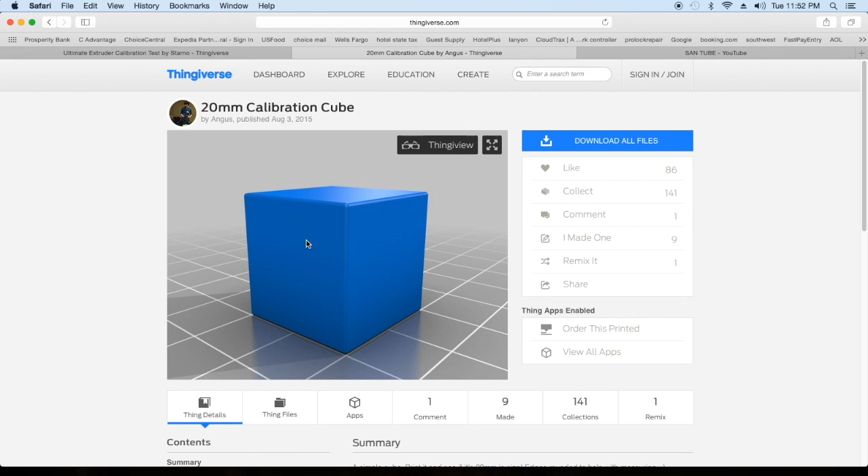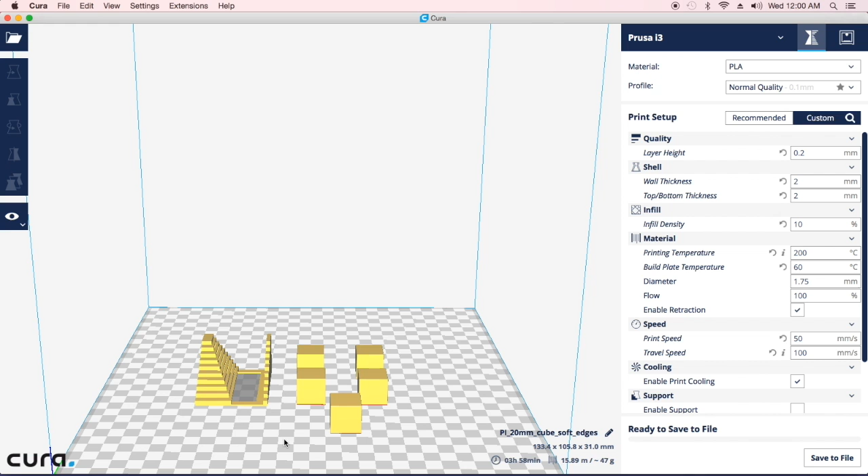So the first thing we're gonna have to do is go ahead and open up Cura. Okay, so here we are in Cura. We have imported our cubes and our steps, or whatever you call this, the ultimate calibration rate steps. Anyways, moving along. I'm gonna print all of these in the same print. Now you're probably wondering, well, if I'm doing temperature change and flow change and other things like that, why am I printing them all together? This is just a side note, guys. There's a lot of cool things in Cura that I feel like people don't know about. I am going to make a video about this later, but for right now, just really quickly show you.

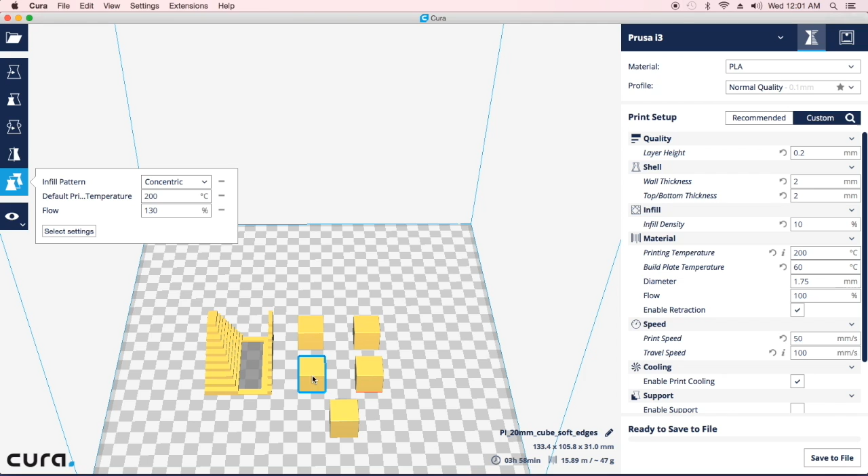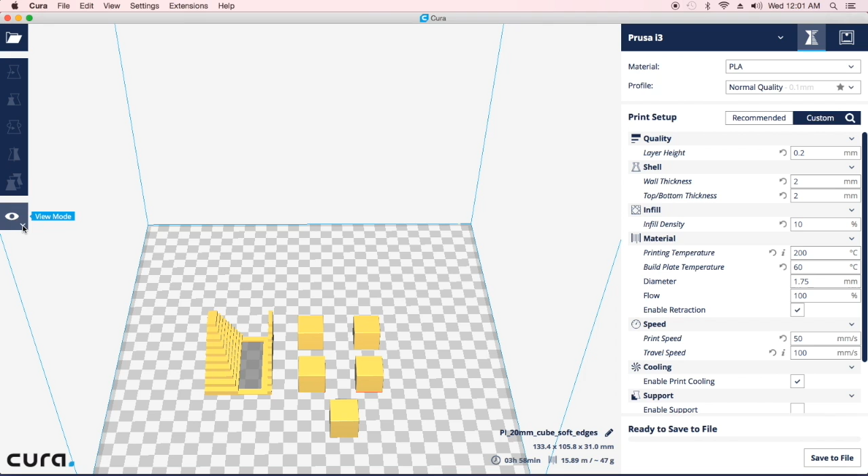If I click on this cube back here, my infill pattern is different, my temperature is different, and my flow is different. I click on this one, it's just whatever settings I have here. Here, again, infill pattern, temperature, and flow is different. So the temperature on this is normal, but the flow is different. It's higher. On this one, my temperature is higher, but my flow is different. And this one is just the perfect print. This one, we're going to go ahead and adjust this in the tuning feature of our 3D printer because I can't cut off sections here. But this is actually a pretty cool feature, guys, that I am going to make a video about later.

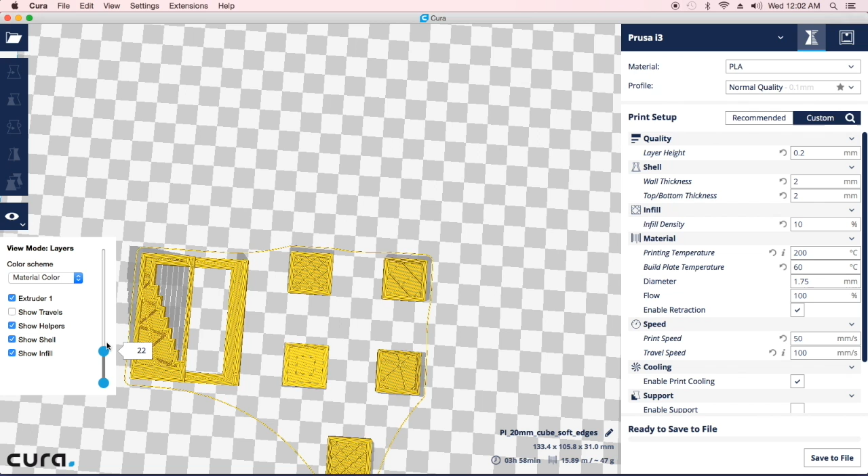Just to let you guys know, I mean, if you just get rid of this crap. If you just look right here, every single one of these is different. I mean, I got different infills in all of these. I got different temperatures in all of these. You can do different layers. I mean, you can do whatever the hell you want to each individual thing and print them all on the same bed.

But again, that's something I will go over in another video. I will make that if you guys want it. If not, there's a brief description of it.

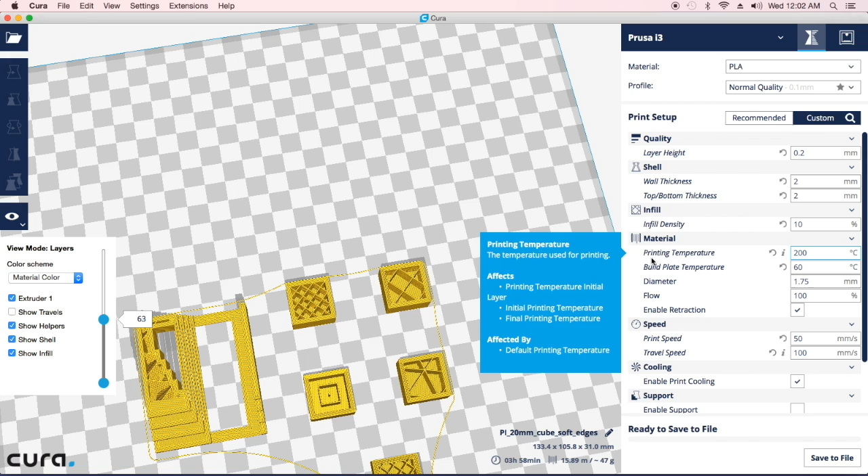But by default, we're going to do layer height 0.2, thickness 2, bottom and top thickness 2, infill density will be 10, temperature will be set at 200, build plate temperature at 60, diameter of course 1.75, flow will be at 100. We are going to enable retraction.

Retraction, basically what it is as you see here, guys, this is just a travel of how it's going to go, but this could actually be stringing. Okay, if you don't turn on retraction, the extruder or your nozzle will be spitting out filament as it travels from here to here. So that's what that is. So we're going to leave that turned on.

The speed's going to be 50, and the travel speed is basically when it gets here and is going here, it's going to move faster. So while it's printing, 50, from here to here, 100. Okay, I've turned on the fan, so basically by default the first couple of layers will not get any kind of cooling, just so it comes out nice and hot and sticks to the bed.

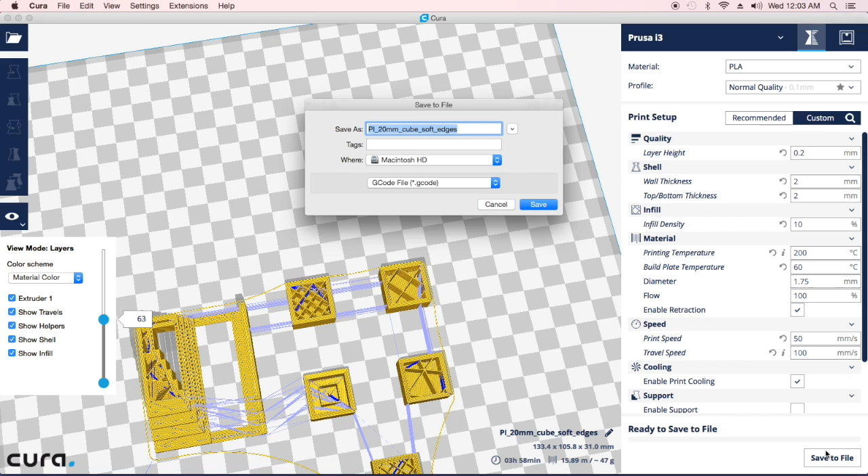Okay, so with that said, I'm going to go ahead and save this to my desktop like so, and just hit save, and we're all done on this one. So let's get it printed. And I think I might go back and change these guys and print the cube separate and print this separate. Actually, I am going to have to print it separate because I got to change this manually.

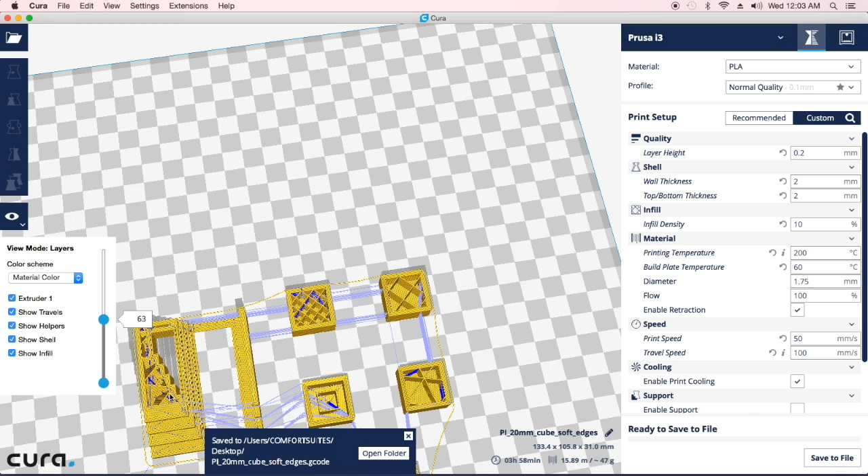So let's go ahead and delete that. Then I'll make a different Cura STL file for that. But I'm just going to go ahead and save this, and then after I do that, we're going to go ahead and start with the printing.

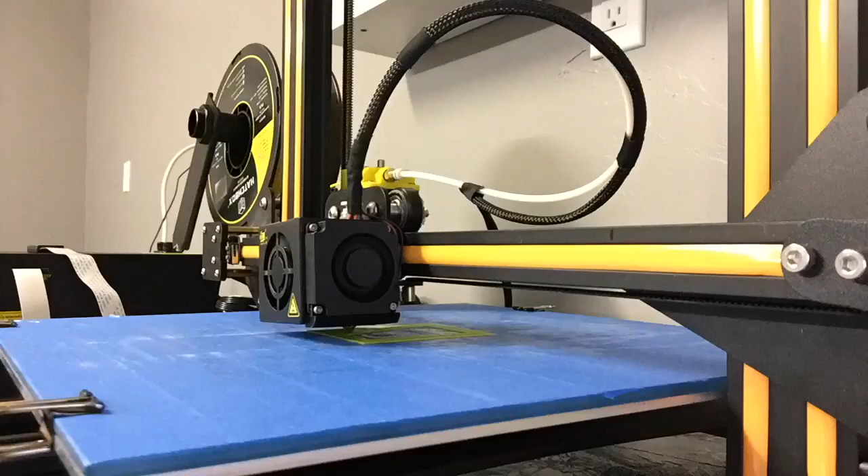Okay, so the printer is printing here. We're just going to go ahead and make some tiny adjustments to it. Given your printer, if you are able to change the settings in the control box, that's great. If not, then unfortunately you're going to have to go into the slicing program again, and from there redo all the settings. Okay, so what I'm going to do is go to tune, and the first thing I'm going to change is the nozzle temperature.

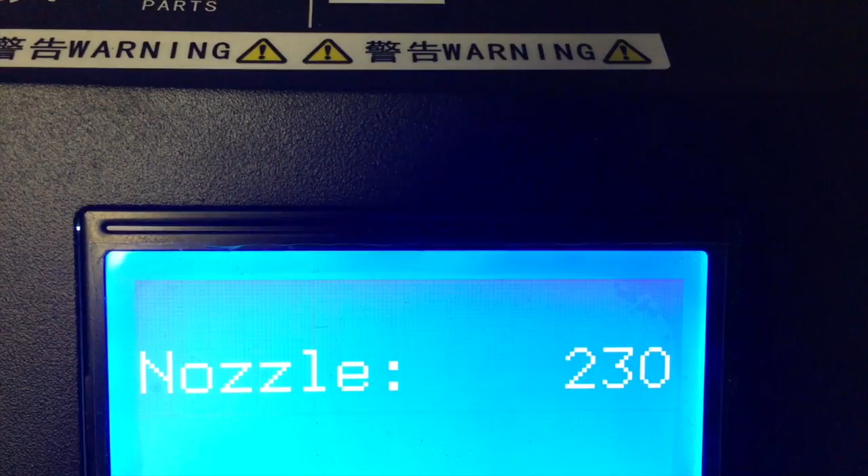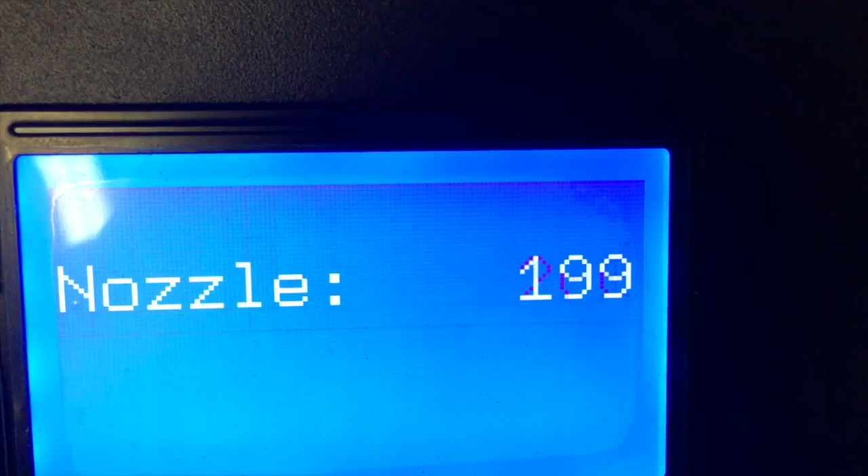Now, the filament that I'm using is temperature gauged for roughly around 180 to 210, but I'm doing it at 230 to prove the point. So I'm going to take that down to about 200. And that's the first change we're going to make. And we're going to give it some time and let it print and see what happens.

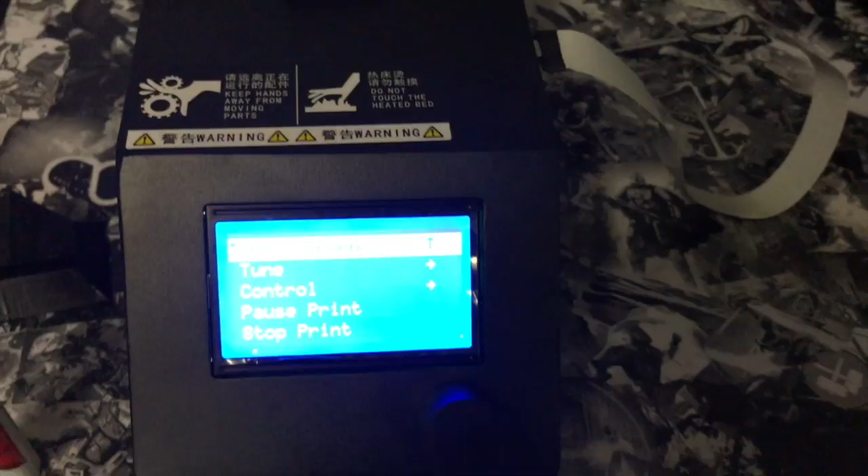Alright, so right there we went ahead and changed our nozzle temperature from 230 down to 200. Now we still have the flow rate, which is a little bit higher, but this will just do the temperature itself, so we can point out a difference at the end and you can take a look. We're about to stop it again and go ahead and do the flow change.

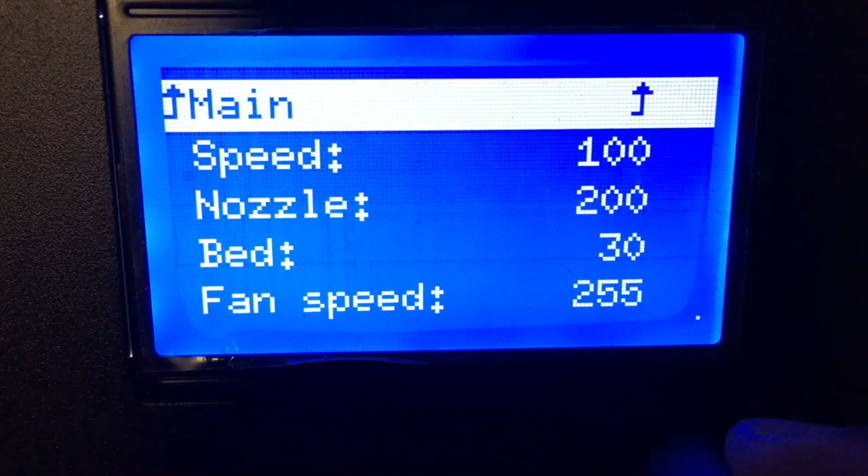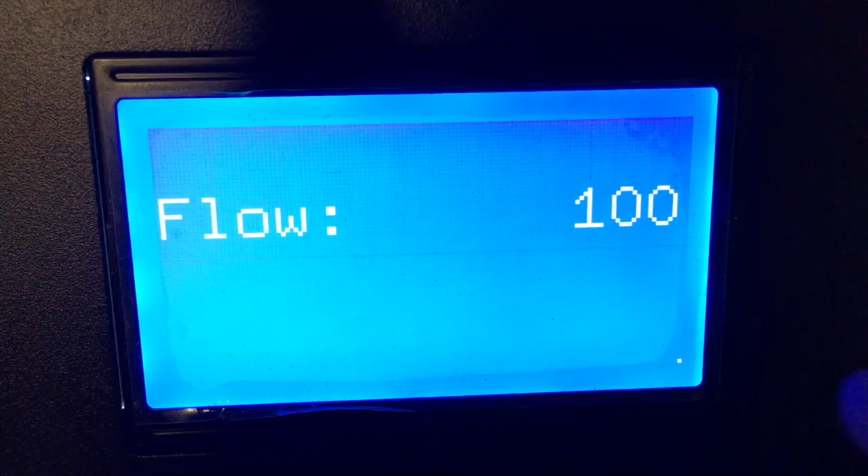Alright, as you can see, the print is still going. We're going to make a few more adjustments on our control box here. We're going to go to tune one more time. And we're going to change the flow from 130 down to 100. Okay?

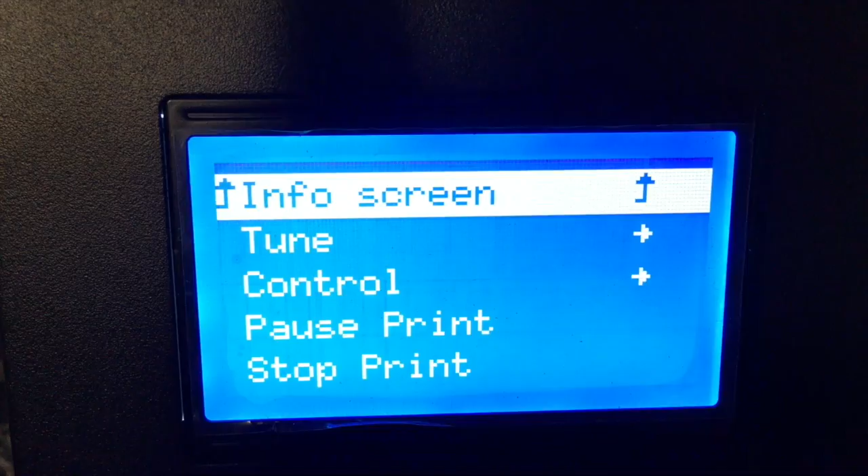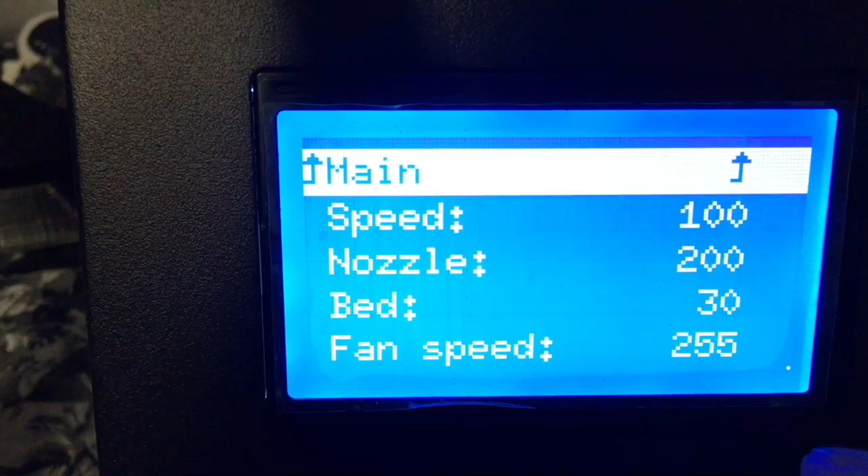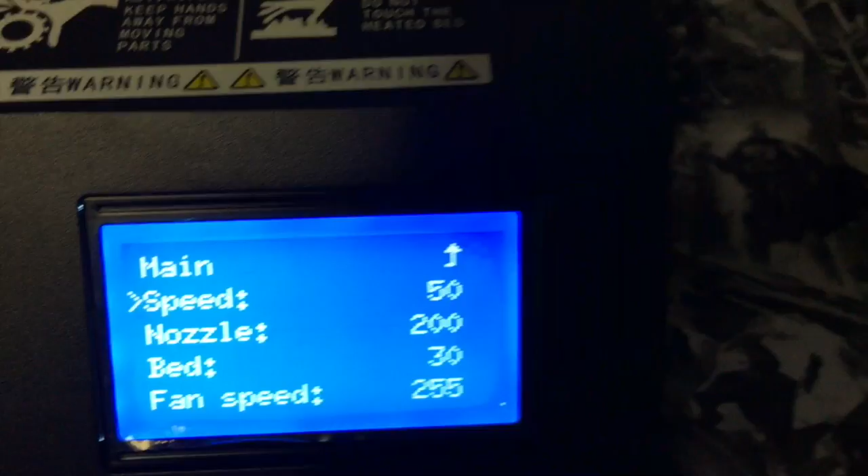Right back up here. Oh, one more thing we're going to change, guys, on here is the speed. We're going to take the speed down from 100 down to 50. And we're going to see how much of a difference that makes. So now you notice the printer is working a lot slower speed-wise, which is going to increase my time, but that's okay.

Alright, so we went ahead and changed the flow rate and the speed on that. So we reduced both. So now our filament is coming out a little bit slower, and the speed that we're actually pushing that out has gotten slower as well.

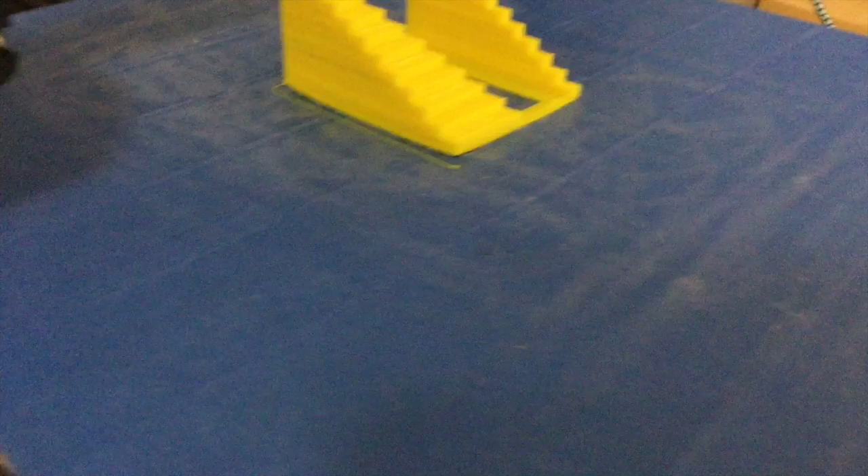Now one thing I want you guys to notice right here, right off the bat, with the print still on the bed, do you notice the curve right there, which I'm going to talk about later? Because of the heat, it did not stick to the bed, and I usually never have that problem. So these are just some of the things that you're going to run into if you don't calibrate it right. So now this is just a different angle of that, and on this side you'll notice there's a little bit of warping as well. Nothing too dramatic.

After this, we're gonna go ahead and take this bad boy right off the bed and get started on our little cubes. Alright guys, so now we're printing out the cubes, and the back left is going to be the one at the higher temperature, and the front left is going to be at the high flow rate or the extruder rate, and the ones on the front and the sides are just there like normal, just to show you guys what it's supposed to look like. Okay, so let's get these done printing and we'll go from there.

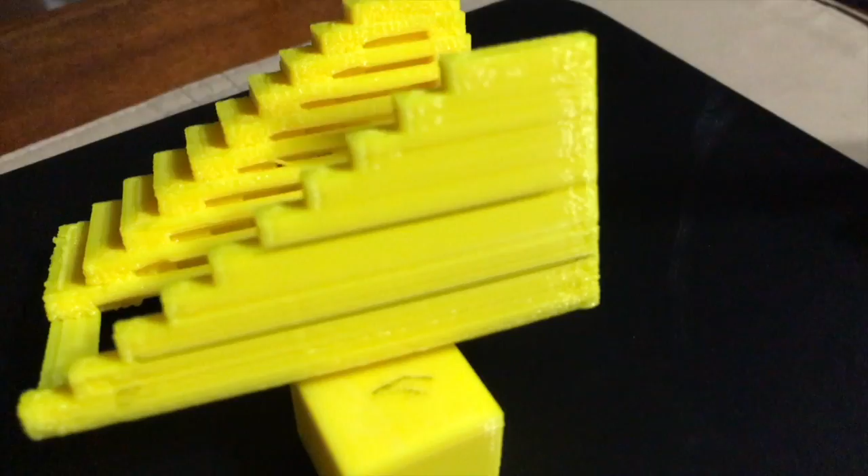Alright guys, so we got the calibration steps printed. What I'm going to point out here is you got two lines, one here and one here. Basically, if you notice this area here, it was printed at 230 temperature, when the recommended was 180 to 210, but we went a little bit over, and from here to here we just turned down the flow from 130 to 100.

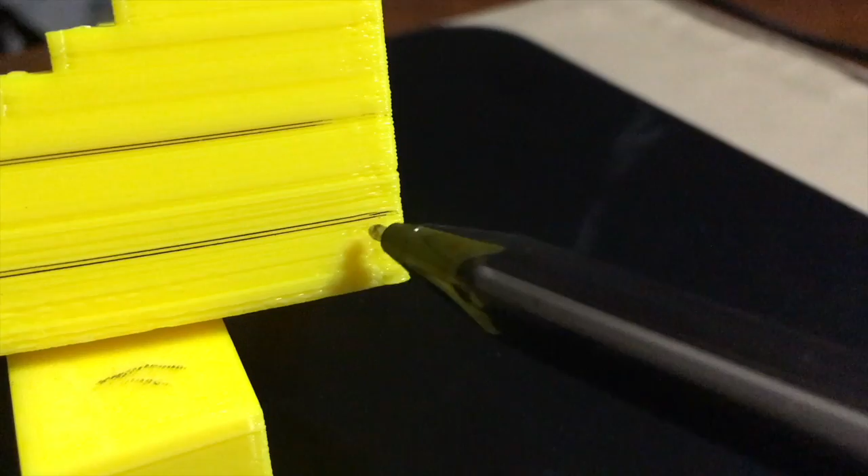If you look right down here, see, the layers are not very smooth. There's a little bit of gap because there was so much heat, it didn't give it time to properly cool, so it didn't stick together that well, and that's why you have this line here. And look at the edge, got the little bubbling right there, looks like it was melted, and that's because again the temperature was too high.

But now pay attention from here to here, we got a little bit of improvement, and all we did here, we just took the 230 and reduced it down to 200. Now the flow was still at 130 and 230 for temperature here. Here we turned the temperature down and took the flow from 130 to 100, and you can see the difference, from there to there.

And then from here, basically I just turned the speed down from 100 to 50. So you can see temperature makes a difference, the amount of flow makes a difference. When you have everything set right, look at how smooth that is. Also down here you'll notice the melting, but notice as you get higher and higher, it gets sharper and sharper. So eventually you get to this point where it's just a straight line. These don't look straight at all, they look edged.

Now another point you can look at is here. Notice, I don't know if you can see it, down here it's a little saggy. Basically when it printed, it didn't give it enough time to cool down, so this started sagging down. Again, this was the temperature, and here we just turned down the 230 temperature to 200, and we also reduced the amount of, not infill, but the amount of flow that was coming through.

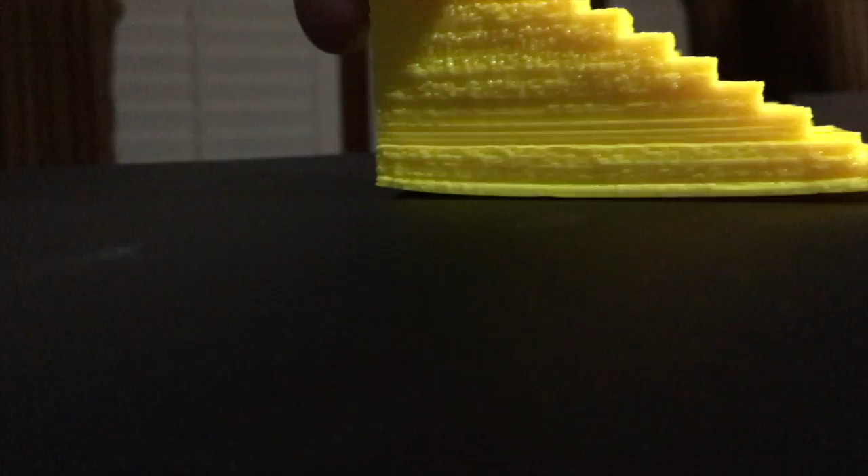Now, I don't know if you guys can tell, but because the temperature was so hot at the bottom, this part's actually warped. It's not a straight line, it actually curves. Let's take a look. There it is. See how this part's not touching the platform, and this part's not touching the platform, but the middle is. The reason it's doing that is because it was so hot, it didn't stick to the bed, and it popped up. So these are some of the main concerns that people have.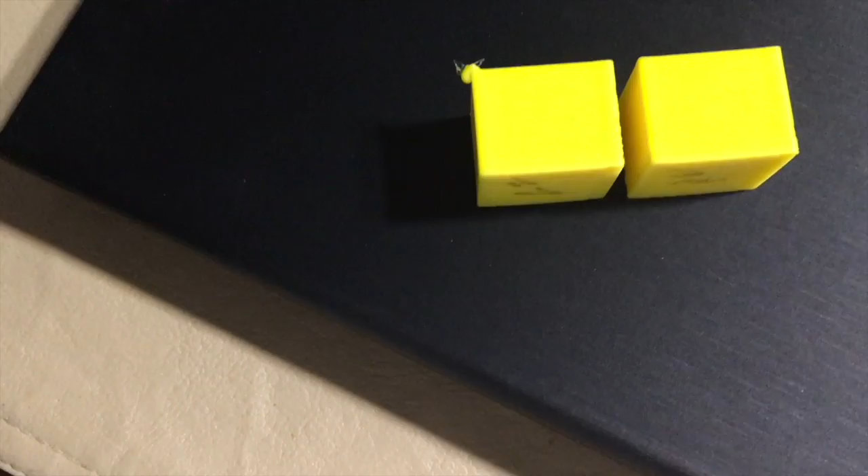Alright guys, next we're going to go over the calibration cubes that I printed out, and these are basically the same thing, but this one has a temperature of 230, while this one is a temperature of 200. The very first visible thing you'll notice is if you pay attention to the edge right there. See how it's jagged? It's not straight because it was so hot it wasn't able to bond too well together. Now, exact same settings, all I did is turn the temperature down here.

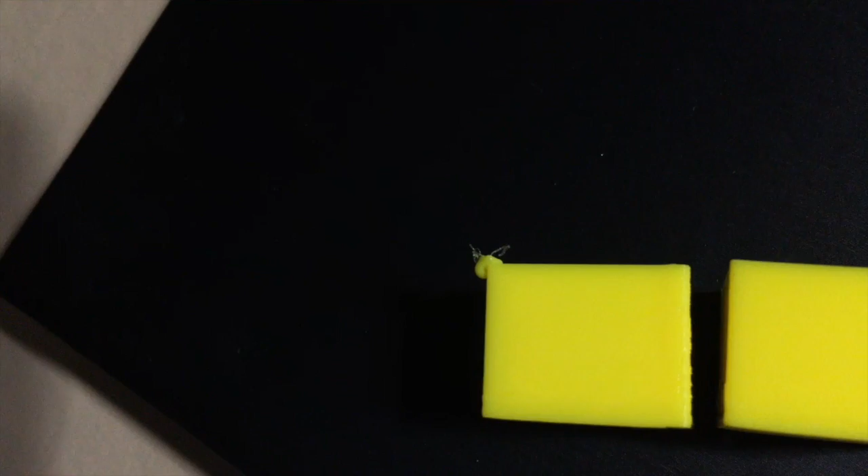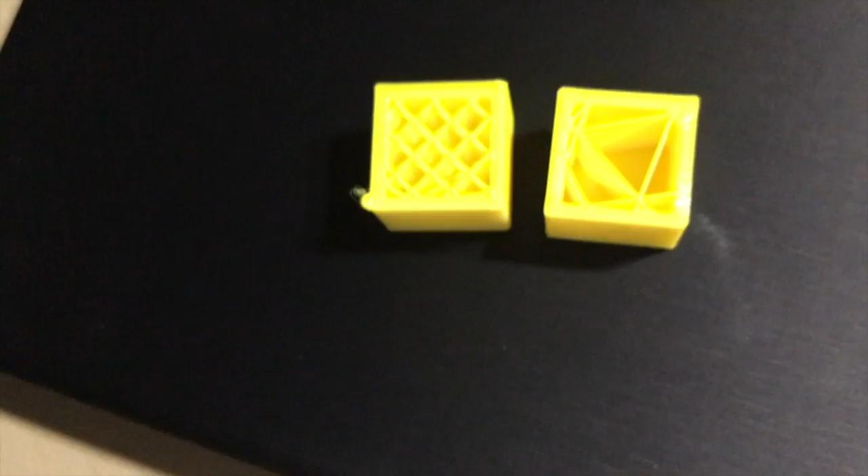Take a look at that line. You can actually see it all the way through, straight line. Here, riffles or ruffles, whatever you want to call it. Here, straight line. That was one of the things. Also, another thing was, if you look at the infill itself, right on top here, you'll see like stringing. It's there, it's bonded, but it's stringy. Here, it's a lot smoother.

Also, you'll notice here, there's a gap. But on this one, there's no gaps all the way around. So that's something you do want to pay attention to. And these are the little things that make a difference.

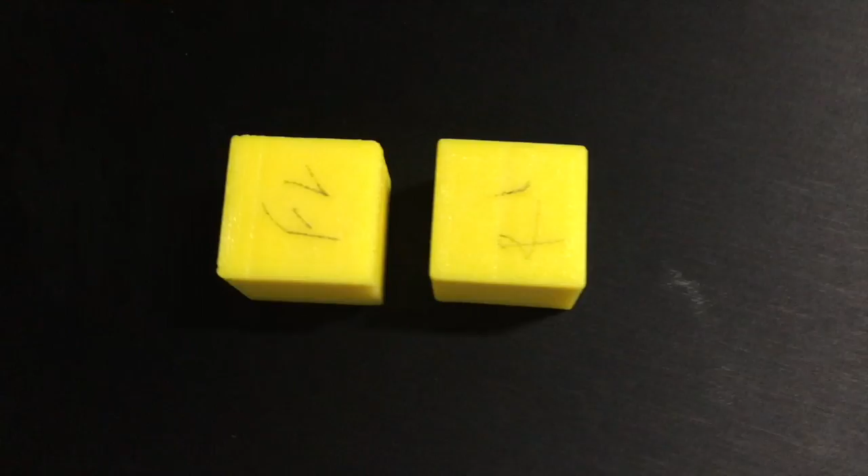Okay, next. The next set of cubes, the only difference was one had 130 flow, the other one only had 100. So this is the one that had the 130 flow, while this one was the one that had the 100.

I don't know if you can see it or not, but right here, because it was flowing so fast, the base wasn't able to lay it down correctly, while here you get a smooth straight line all the way through. Also notice the edge here, straight. Notice the edge here, somewhat straight because the temperature was turned down to 200, but because it laid it down so fast, you still had imperfections.

Same thing here. Notice all of that. While here, I mean, it's smooth. You don't notice anything. Okay, now the last one I printed, this one was printed at 200 temperature, 100% flow, 50 speed. Okay, so this one is how your prints should come out to be. Okay, notice straight lines.

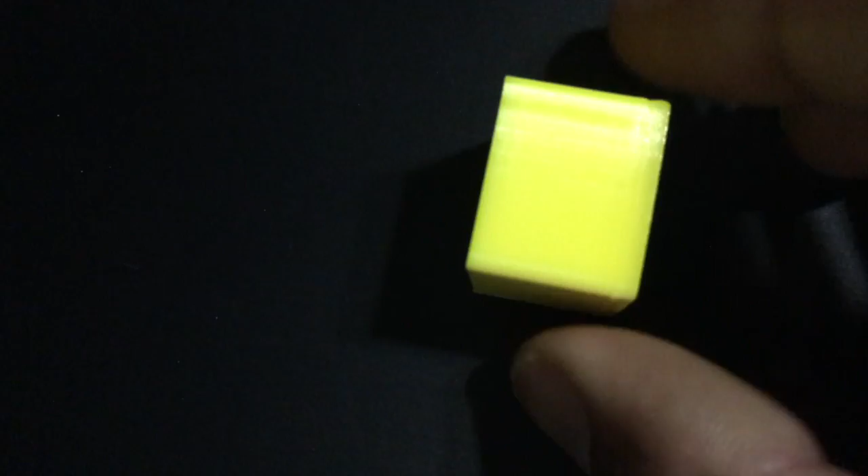Okay, no imperfections on these. Look at that, beautiful. Even the infill on the inside, no stringing, no nothing. Everything is perfect. You can see straight all the way down, and that's how you want your printers to print. Okay, so these are some of the comparisons that I want to show you.

Now you're probably thinking, well, these imperfections aren't that big, so why does it matter? Well, imagine if you weren't printing tiny little cubes the size of nickels, and you were printing huge prints, and you got little imperfections like so, where your edges weren't straight, or your layering, which one was it, right down here, wasn't that great, and you started getting bubbling on it. So it does make a difference.

Now I didn't do too much of a temperature change on this one. Now you can get the same effect if your temperature is too low or your flow is not high enough; it can result in imperfections in your print. So just keep that in mind. Right, ladies and gentlemen, so that is some of the reasons why your prints don't come out too well or they are failing. Okay, guys, the amount of filament that you flow out of that little nozzle makes a huge difference, and at what temperature it seeps out at.